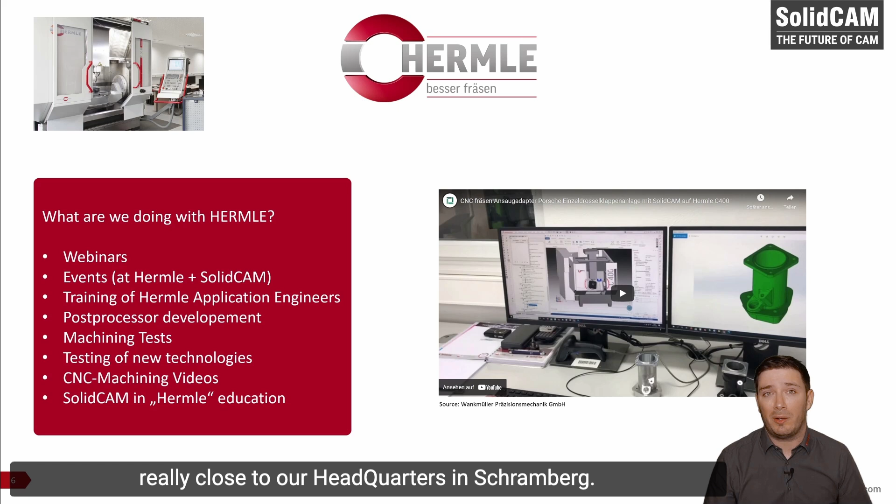Starting with Hermle. Hermle is really close to our headquarters in Schramberg. Having this proximity, it's really easy to just hop inside your car, drive to Hermle, and for example, test a post-processor or test a new technology. What we did in the past, we had webinars, we had events, we have trained their application engineers.

So you can see that we are spending a lot of time and effort getting the people at Hermle up to date. And in exchange, we get updated about the newest machining trends, and we adapt our software to the needs of the market. And of course, we also developed a specific way of NC output that is based on Hermle's, let's say, recommendations.

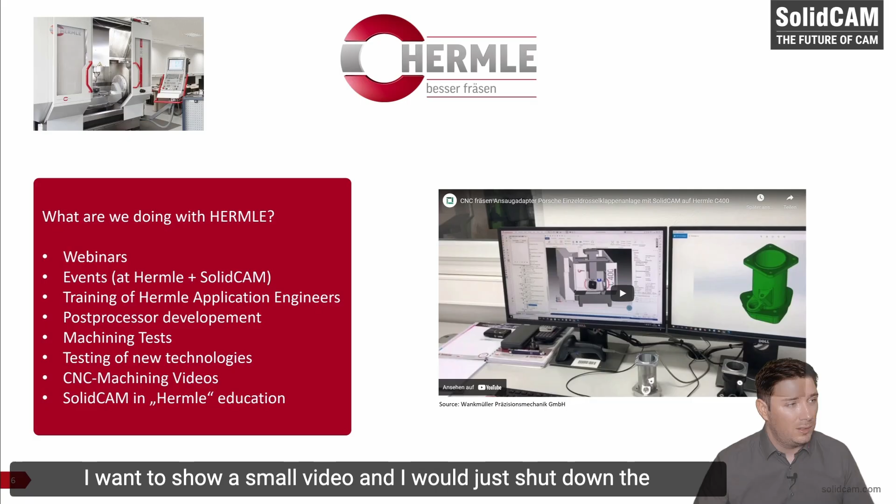I want to show a small video, and I will just shut down the webcam for a little bit, because this video is something that our customer Wankmüller Präzisionsmechanik did. And why am I showing this, you might ask? Well, if your technology partner and SolidCAM are doing the right job, we are creating passion about CNC machining at our customer site. For example, Wankmüller Präzisionsmechanik, they're doing a lot of videos showcasing the CNC process and how they have programmed it in SolidWorks in SolidCAM.

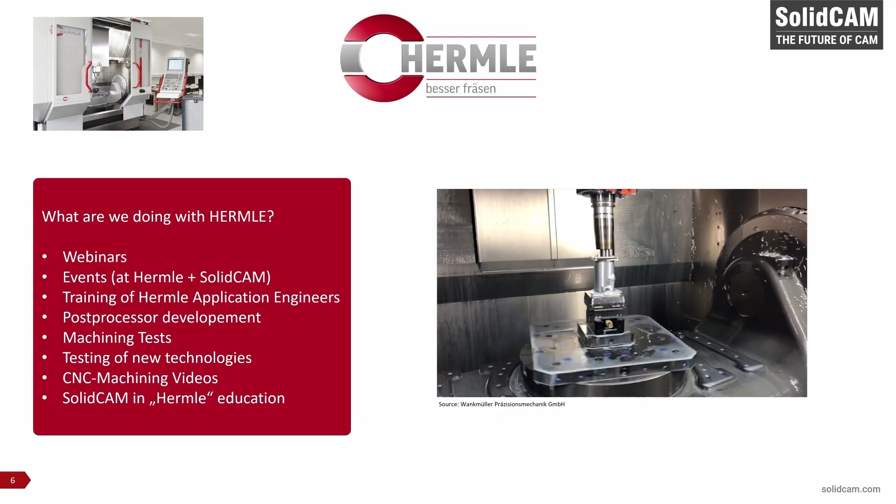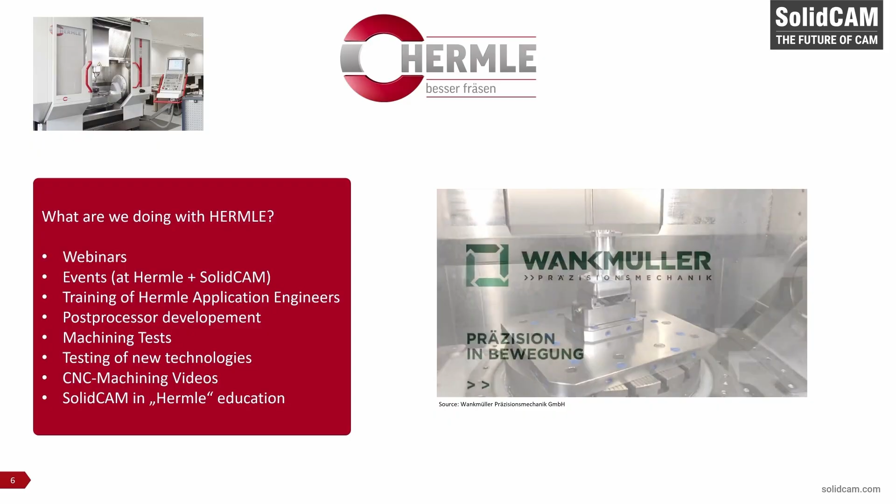So thank you, Wankmüller Präzisionsmechanik, for creating such great content. I really enjoyed watching it. So the next slide is about another interesting technology partner we have. It's about Fanuc. We created the partnership with Fanuc, I would say, also decades ago. And you probably ask yourself, what are we doing with Fanuc?

Well, for example, they opened a new branch in Neuhausen, and we were able to present ourselves at this, let's say, opening festival that they had. And for example, we created this robot and we milled it out of a solid block. And I really think this part is a remarkable part. And we're going to see this part a lot more often in the future.

Again, we are testing and developing new technologies together with Fanuc. We are doing some webinars, we are doing online events. So everything that really helps Fanuc and ourselves be at the top edge of manufacturing right at the moment.

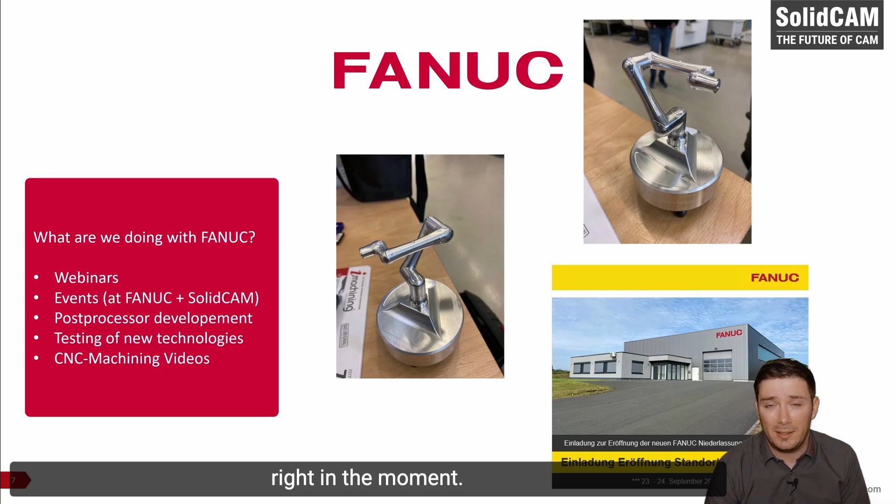Next, I would like to talk about Grob. Grob is also one of the biggest machine tool manufacturers in the whole world. And fun fact, they were our first iMachining for NX customers, and until today, they're using iMachining for NX inside their own production. And this shows us how great our iMachining technology really is and how unique it is.

What are we doing with Grob? Well, for sure, we were implementing, as I said, the first iMachining for NX at Grob's production site. We are doing a lot of events together with Grob.

We are doing post-processor development, we're testing new technologies, we're doing CNC machining videos. For example, the rim that we have seen so often in the internet, we got over 1 million views on it. We machined at the Grob facility in Mindelheim. And I did a small video from Grob.

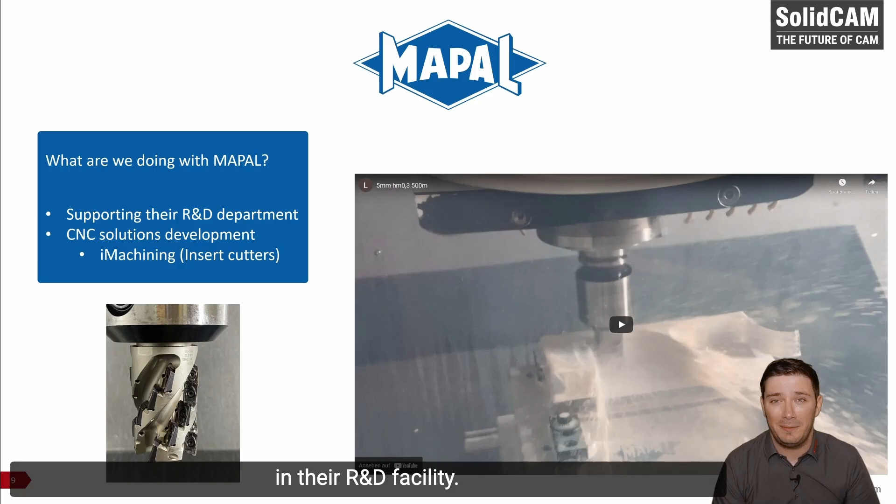The next slide is about a tool manufacturer, and it's about Mapal. And there is one fun fact about Mapal which I would like to share first. So it's not a fun fact about the company, but about a guy who is working at Mapal. So Mapal is using SolidCAM in their R&D facility. And there is one guy who is our contact person at the R&D department. And he likes SolidCAM so much that he even bought SolidCAM for his private home, let's say, garage company. And I think that's a really remarkable thing that he did.

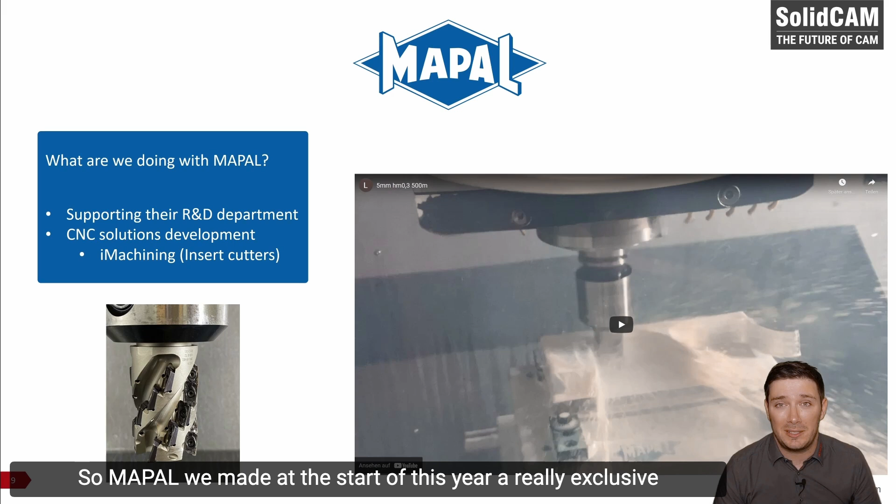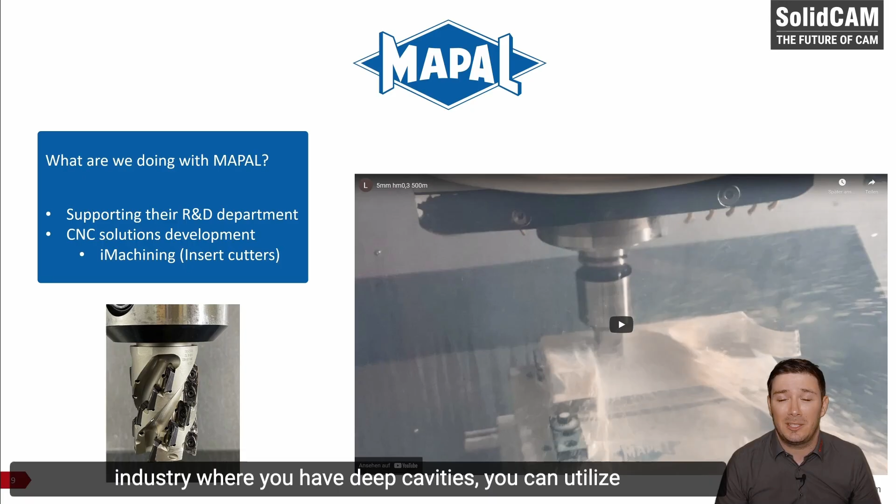So Mapal, we made at the start of this year a really exclusive iMachining test cut in Aalen, where the Mapal headquarters is located. What we did is we tested our iMachining technology with insert cutters. In this case, we have a 50mm insert cutter, which would be for the inch guys about 2 inches. So it's a really big tool. And especially in the aerospace industry, where you have deep cavities, you can utilize iMachining with bigger tools in a really, really awesome way. So let me just show you the clip and just listen to yourself how great it actually sounds.

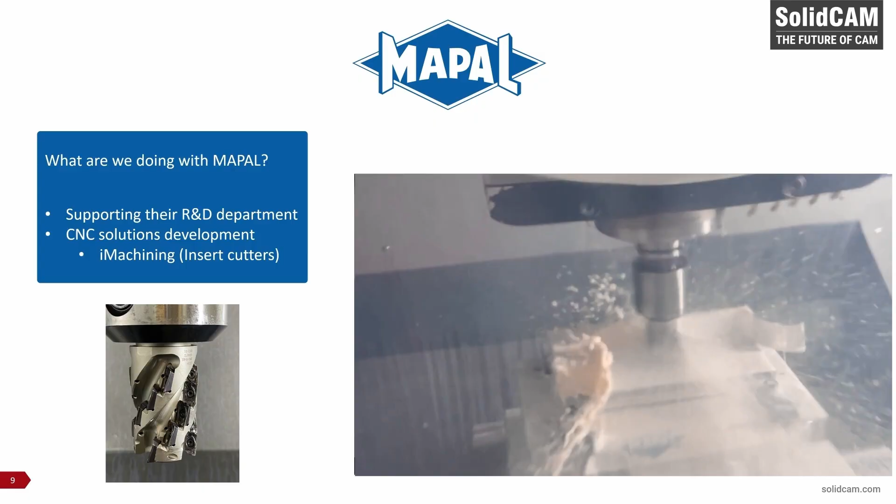So I think you all noticed how great iMachining sounds even with insert cutters. iMachining is developed further and further in every SolidCAM version. And in the future, we will hear a lot more about iMachining for insert cutters.

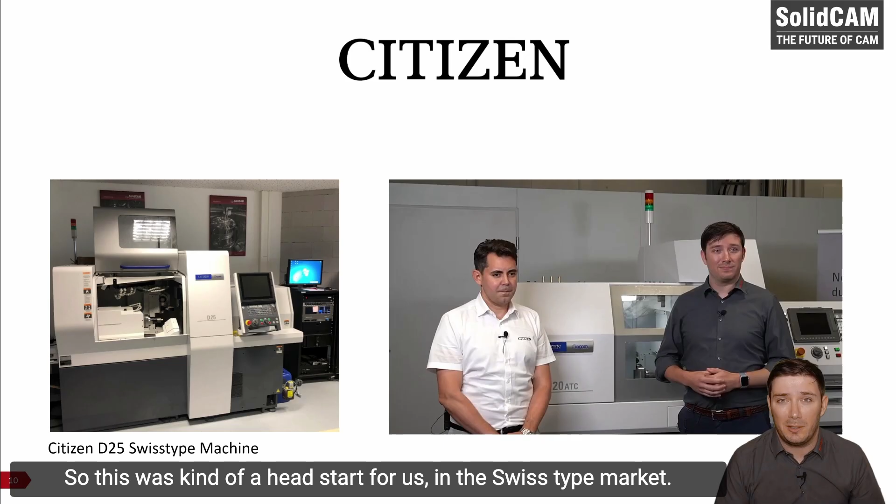Okay, next I would like to talk about Citizen. We have actually, I would say, long history with Citizen. A few years back, we got the first Citizen L20 inside our technology center in Schramberg, and we started to develop SolidCAM until it worked on Swiss type machines. So this was kind of a head start for us in the Swiss type market.

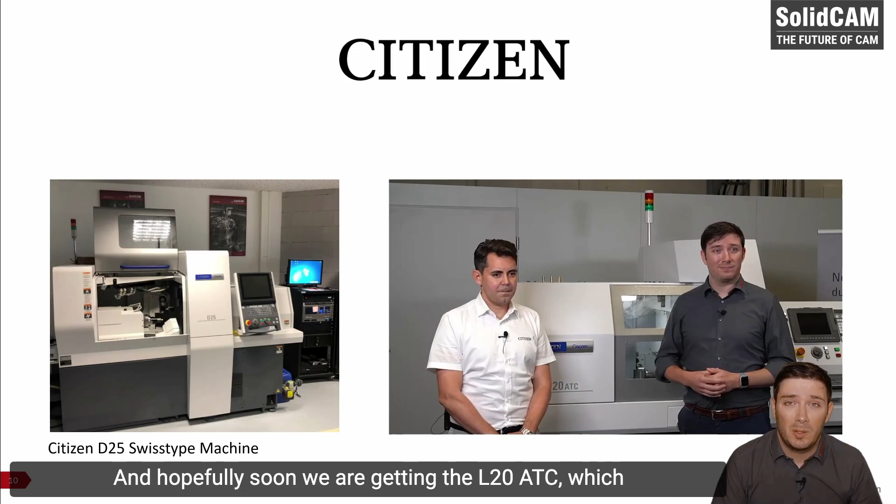Meanwhile, we got a second machine. It was the Citizen D25, and hopefully soon we are getting the L20 ATC, which is a machine with a B-axis and automatic tool change. I'm going to put this video here because I truly think that this indicates how good our relationship with Citizen actually is.

Hi and welcome from the Citizen Machinery European headquarters here in Esslingen. Addlen, the last time we were standing in front of a machine together, it was the D25 located in our technology center in Schramberg. Today, we are standing in front of a Citizen L20 ATC. Can you explain a little bit more what the specialty about this machine really is? Yeah, sure. First, welcome to Citizen. I'm happy to have you here. Last time we were in front of the D25 in Schramberg in your office.

Before starting to explain the machine, I just want to highlight to our customers that when we finished the D25 live stream in Schramberg, you asked me, what is the next challenge? Exactly. We make the post-processor, we make a part, we deliver it to the customer, and we make a live stream. And then immediately, if you remember, I told you L20 ATC, this new machine is interesting for your software. Why? Because this is the L20 with the servo B-axis, servo programmable, plus ATC technology, an automatic tool changer inside.

It means we have a magazine with 12 rotary tools supplying tools to the B-axis. Means in the system of the B-axis, totally 13. Yeah? So you can make very complex parts. Medical sector, for example, we already delivered machines to our customers. And you know, medical parts especially, or also job shops with complex parts with a lot of milling and drilling, are not easy to program by hand because there are a lot of points to calculate.

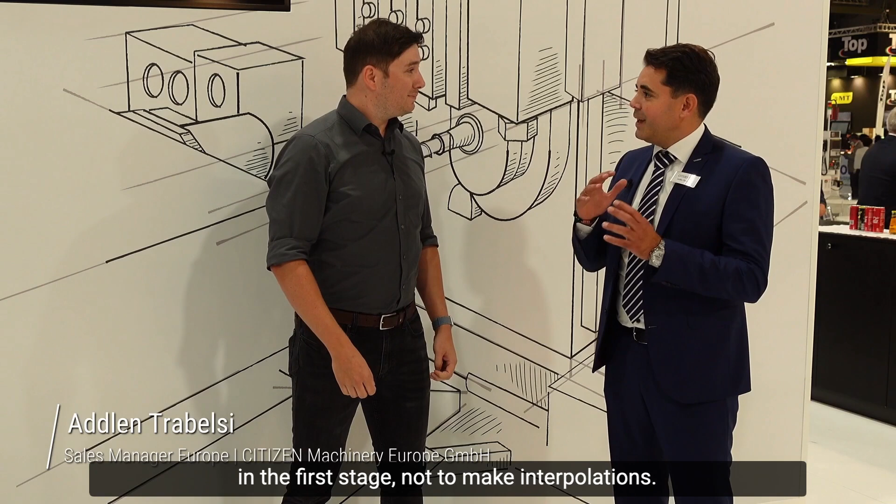Definitely, because your customer, our customer, buys a machine with B-axis in the first stage not to make interpolation. Exactly. They buy the machine to have a comfortable adjustment of angle and correction. Yeah, sure. But then, let's say after a few months or a few years, he will make complex parts and need the software, then he will call you and he will call me, we need to make a post-processor as soon as possible. And this is not comfortable for you, for me, and also for the customer.

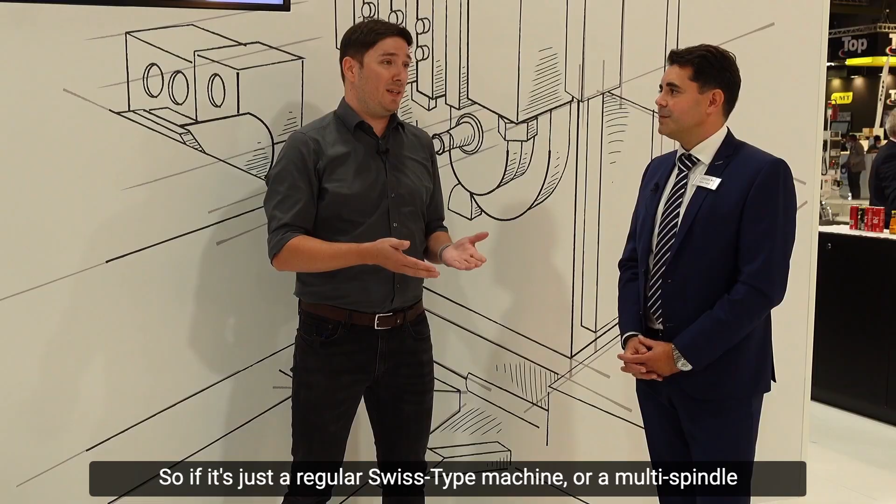That's why I am happy that you are here, we can prepare ourselves for Miyano and SolidCAM, prepare post-processors for your customers. And this is the main target. Yeah, definitely. I mean, actually, we almost got all post-processors ready for Miyano and Citizen machines. So if it's just a regular Swiss-type machine or a multi-spindle machine, it doesn't matter. We got the software, you have the machines. So I would say, let's make it happen. Perfect.

Our announcement is that we are going to prepare special packages from Citizen plus SolidCAM. We will announce the packages in more detail at the end of the year when we have more information. The technology is one point, but the customer always needs this package, and it's nice to prepare ourselves for the next projects.

I would like to say one more thing. We are here at the exhibition with a lot of machines around us, so let's explain a few machines to our customers, because I think the combination of Citizen and SolidCAM is really added value. As you all know, SolidCAM is today one of the best software solutions to program Swiss-type machines, and that's why we are here. Let's go to the machine.

It's good timing with the EMO. We have a nice machine for 32mm which needs the software, and I will show you now why we need CAD/CAM software.

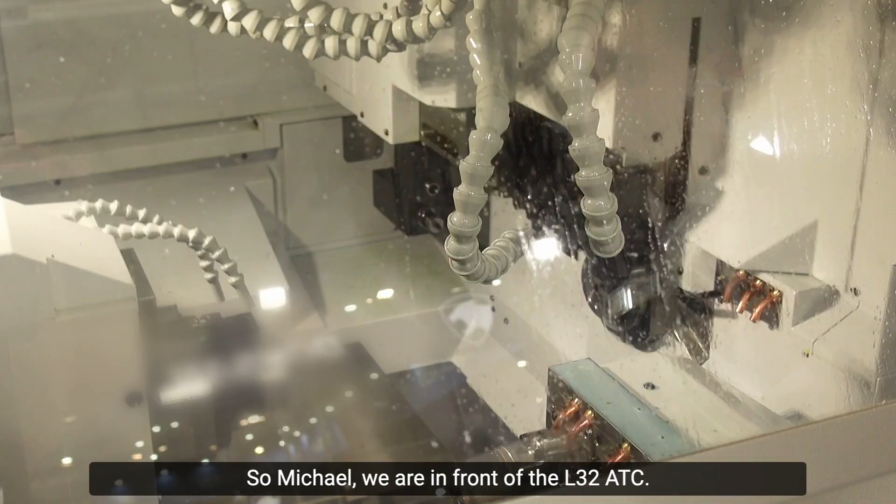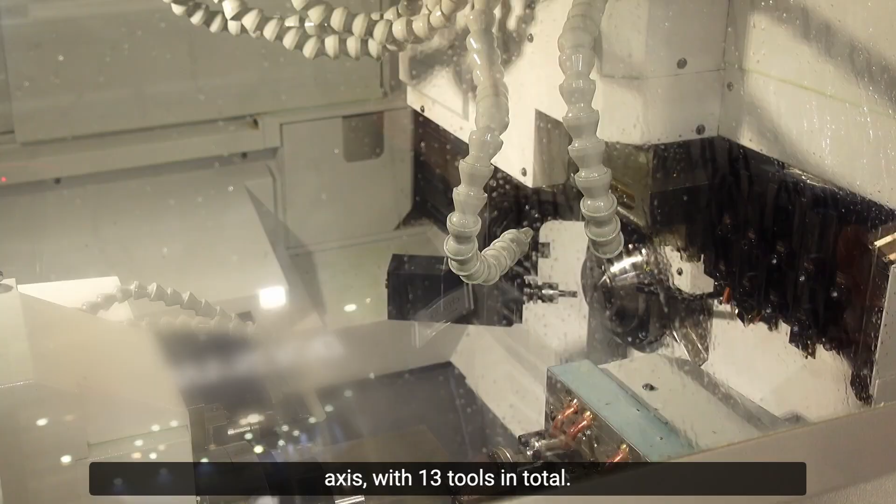Michael, we are in front of the L32 ATC. You remember ATC, we showed it on the L20, 20mm machine. ATC means automatic tool change system, supplying the B-axis servo axis with 13 tools in total, so we can make very complex machining on different complex parts.

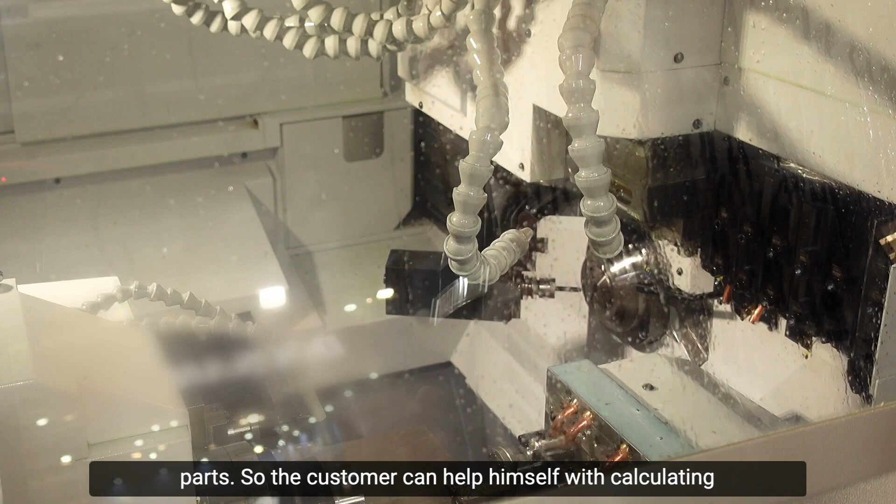The customer can help himself by calculating a few points for making quite complex parts, but a point comes when he needs a good finishing or complex contour with 4-axis plus 1. Then he will come back and ask for your software. This is a typical machine where we can offer it together, the L32 ATC.

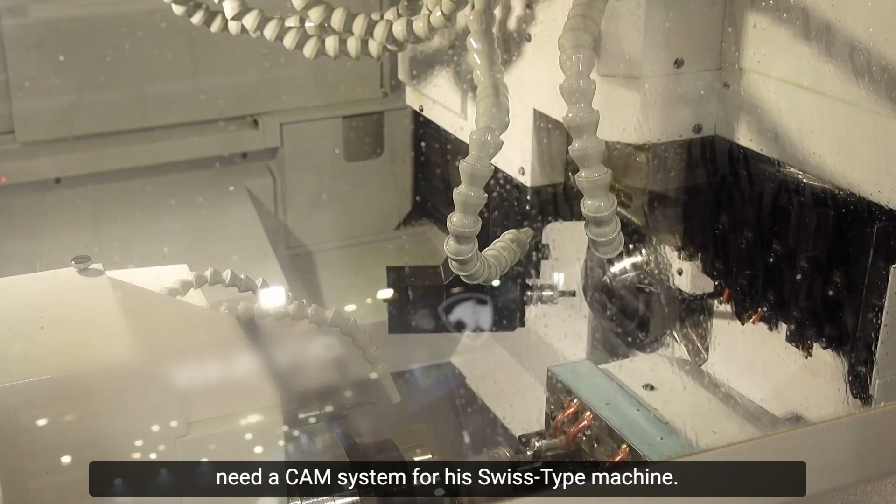This machine is one of the best examples of why you need a CAM system for a Swiss-type machine. Complex parts, more tools than just one on the B-axis - this is something really used a lot in the medical industry with this kind of machine.

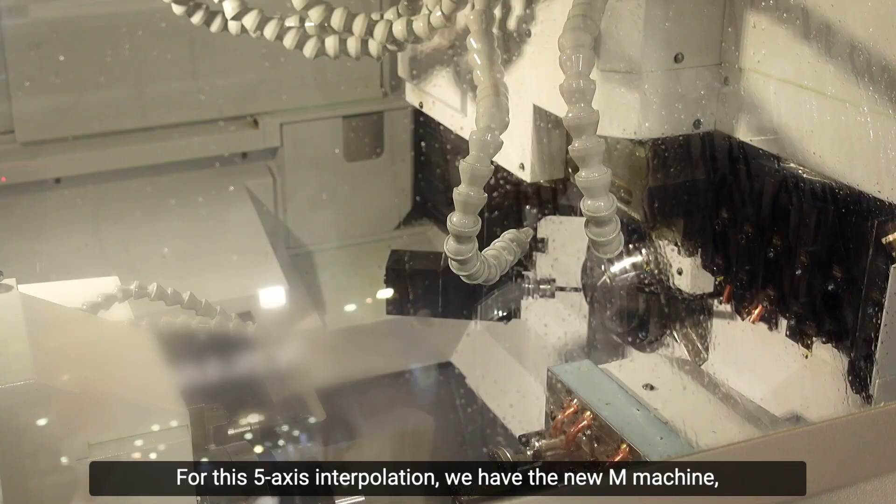Medical industry is one of the key sectors for us for this 5-axis interpolation. We have the new M machine, a new D25 with 5-axis interpolation. Of course the customer needs a complex software, or I would say easy to use, but making complex parts - this is the point.

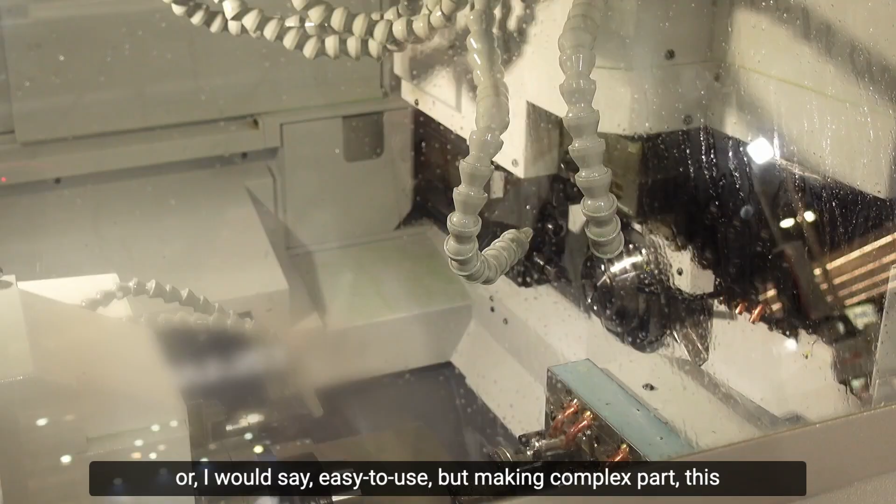Yeah, this is the point for the customer. Adrian, thank you very much for showing us this beautiful machine. Always welcome. I think this makes it more clear why we need a CAM system also for Swiss-type machines, because the parts get more complex and it's always better for the customer to get an easy solution. We are offering the solution, you're offering the machine.

Let's make it happen. Thank you for being here. As I mentioned, we have many different machines in 20mm, 32mm, with ATC, with B-axis, Miyano machines with complex turret, so it's nice to have this cooperation.

Let's see about the project, and the preparation is very important, to be prepared for the customer request. Thank you for being here. Thank you very much for inviting me to your booth.

I would like to add as well that we are not only capable of supporting Swiss-type machines, but also the regular Miyano machines. I think this is also really important to show.